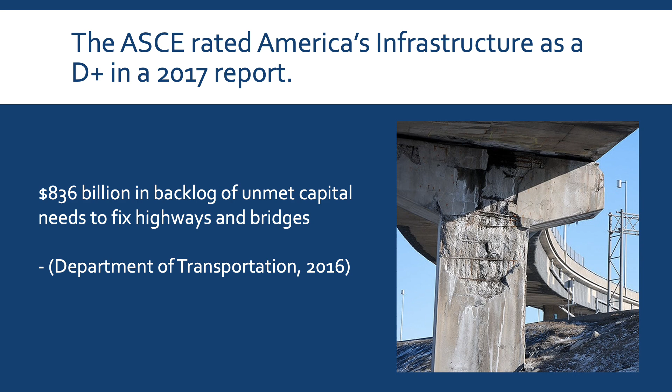In order to compare those two alternatives to the construction status quo, I first will analyze the use of standard concrete in our world. Concrete is a heterogeneous mixture composed of sand, rock aggregates, water, and cement. Important material properties of concrete include its strength capacity and durability, which are highly affected by the concrete mix design and the cement hydration process.

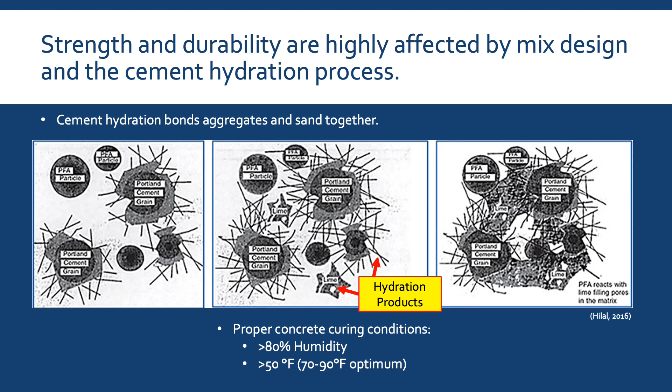Water reacts with cement in a concrete mix over time in a process called hydration, forming chemical bonds which bind the aggregates and sand together. The main reason concrete is so widely used in construction is because of its unique ability to maintain compressive loads.

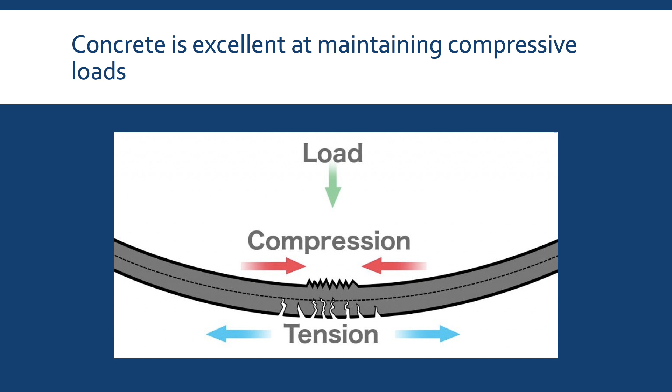However, as seen in this diagram, concrete performs horribly under tension. When bending under a downward load like in this picture, the bottom side of a concrete beam will always be in tension. This will inevitably cause concrete to crack and fail. The largest costs of concrete production are cement and labor.

According to an industry data survey highlighted in the 2017 President's Report by the National Ready Mixed Concrete Association, the average price of concrete was just over $108 per cubic yard. While this price does not account for the costs of labor, formwork, or steel rebar reinforcement, this price could still be compared to other concrete mix designs in which those components are expected to remain the same.

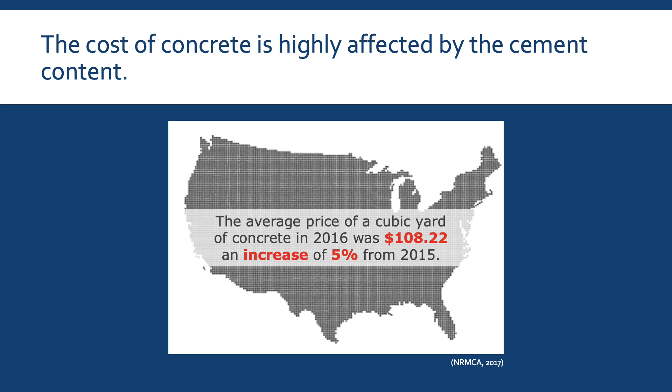The production of cement contributes significantly to global carbon dioxide emissions. The International Energy Agency reported in its 2018 World Energy Outlook that the production of cement, the binding component in a concrete mix, contributes nearly 7% of annual global carbon dioxide emissions.

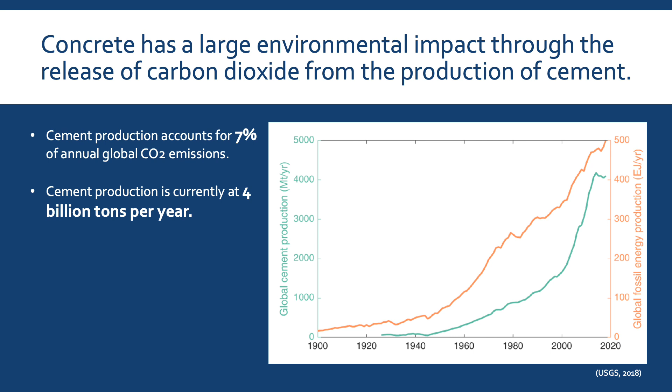The figure here shows the increase of global cement production over time, with an accelerated increase starting in 1980 up until 2020. The environmental impact of standard concrete poses a serious threat to any efforts being made to reduce carbon dioxide emissions and curb the impact of climate change.

The first concrete alternative that I'll analyze is bioconcrete. The idea originated from animals and insects' ability to heal themselves. Hendrick Jonkers, a Dutch microbiologist, and his team at the University of Delft in the Netherlands created a concrete that has the ability to heal itself using living bacteria.

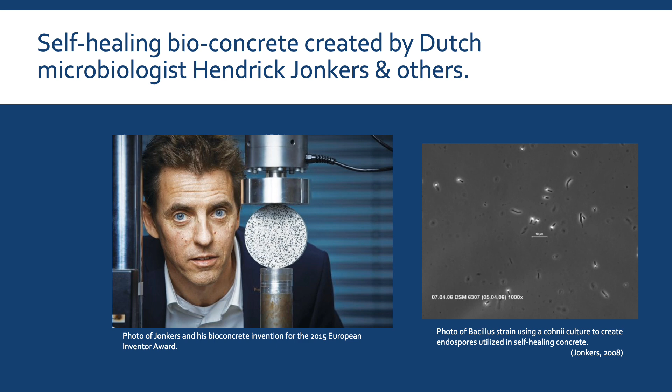Jonkers proposed to mix bacillus bacteria into the concrete during its production. This bacteria will lay dormant until water is absorbed by the concrete when it cracks. This water will dissolve the capsules holding the bacteria and allow the bacteria to germinate and produce calcium carbonate to fill the cracks. The production of bioconcrete is very similar to that of Portland cement concrete.

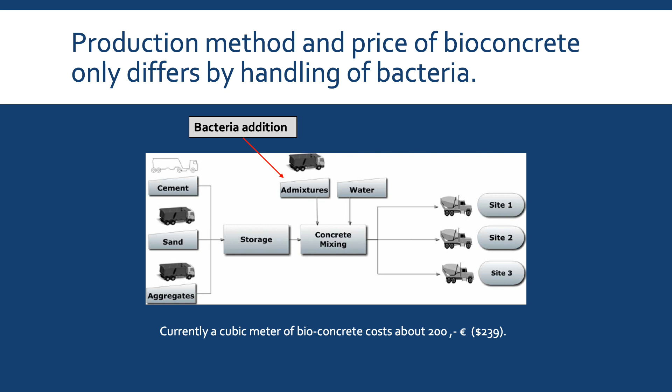The only difference is the addition of bacteria, suspended particles, during the concrete mixing process. Prior to their addition, the bacteria spores are activated and introduced to supplementary cementitious elements like fly ash. Bioconcrete was released to the open market in Europe, costing about $239 per cubic meter, roughly double the price of Portland cement concrete.

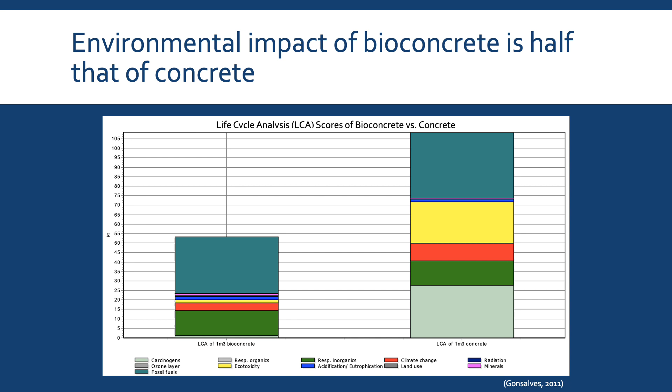Bioconcrete scored a lower LCA score, mainly due to the possibility of recycling bioconcrete into aggregates to reproduce more bioconcrete, hence forming a closed loop by closing its cycle. In addition, this graph indicates that traditional concrete, shown on the right, is much worse in the areas of ecotoxicity and carcinogens. The second concrete alternative that I'll investigate is superabsorbent polymer concrete, or SAP concrete.

Nele De Belie, I swear that is her real name, a structural engineer at Ghent University in Belgium, said polymers might have an advantage over bacteria. Having an elastic material filling cracks is beneficial for bridges, which must bend slightly under their dynamic loads. In previous applications, superabsorbent polymers have been utilized for wound healing, disposable contact lenses, and diapers, but De Belie found a use for them in construction.

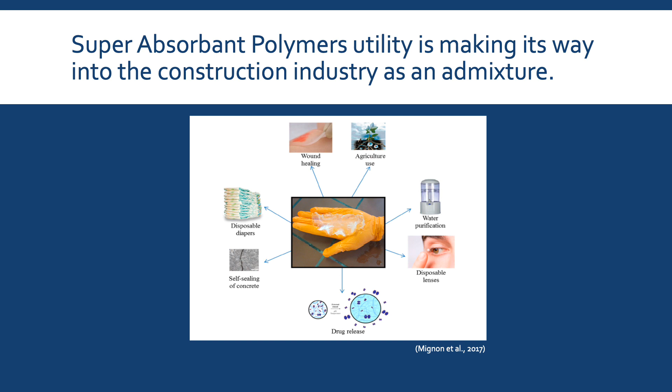Unlike bioconcrete, superabsorbent polymers do not actually heal the microcracks. Instead, they utilize polymers' ability to absorb water, swelling up enough to cut off water penetration into the cracks. The healing process is the concrete's autogenous self-healing ability for closing microcracks using unhydrated cement particles. The SAP will also release water slowly to allow for cement hydration, but not a significant amount to saturate the crack. The figure shows this autogenous process taking place inside a crack.

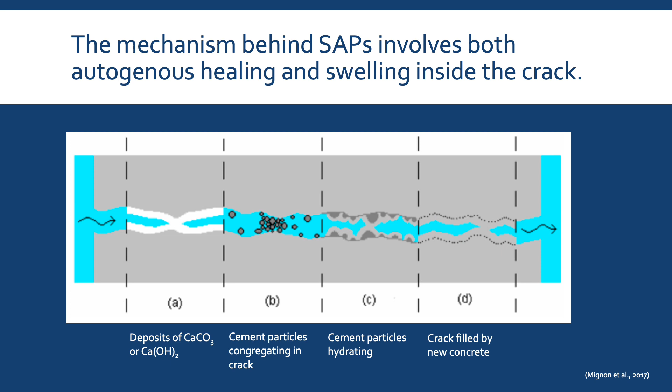It starts on the left with calcium deposits being eroded. Then cement particles will fill the new eroded crack and absorb water. They then swell up and fill the crack with new concrete. While this concrete alternative is estimated to be environmentally and economically beneficial, it is still in its infancy of production and lacks testing. The polymer additive is the only addition to the Portland cement concrete. That, along with minimal prep for the polymers, will likely make this product much cheaper than bioconcrete.

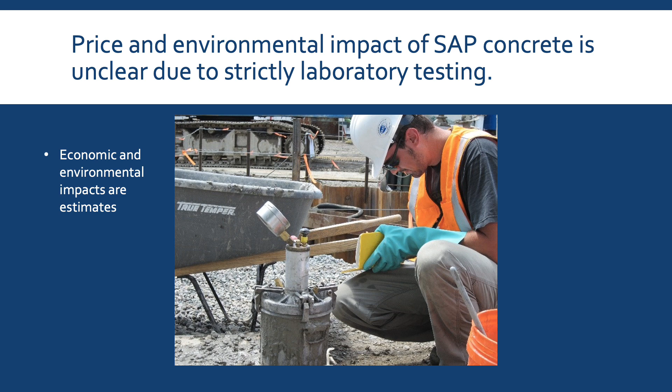SAP concrete also increases the concrete's durability through internal healing. Therefore, less concrete will need to be manufactured and transported in order to heal or replace old and broken infrastructure. This would decrease the CO2 emissions produced by infrastructure maintenance. Again, these are estimates and much more research is necessary in order to accurately assess the environmental and economic impacts of SAP concrete. After analyzing the benefits and drawbacks of each concrete alternative, I have come to a conclusion about which should be implemented in construction.

Both of these self-healing concrete methods show great promise and could be implemented in the construction industry in the near future. However, after comparing them to each other and to traditional concrete, I do not recommend that either self-healing concrete replace traditional concrete at this time. Bioconcrete is currently the better of the two options, but is much too expensive to be used in construction. It is currently double the price of Portland cement concrete. The price will need to drop significantly for construction companies to see its positives.

Also, while there have been some positive tests completed showing bioconcrete's compressive strength, more testing is necessary before the construction industry will trust the results. Superabsorbent polymer concrete is currently the weaker option of the two, but shows more promise than bioconcrete. Unfortunately, it's simply too under-tested to be recommended for use. Despite their inability to be implemented in construction right now, these two concrete alternatives are cutting-edge technology that show great potential to help improve our world.